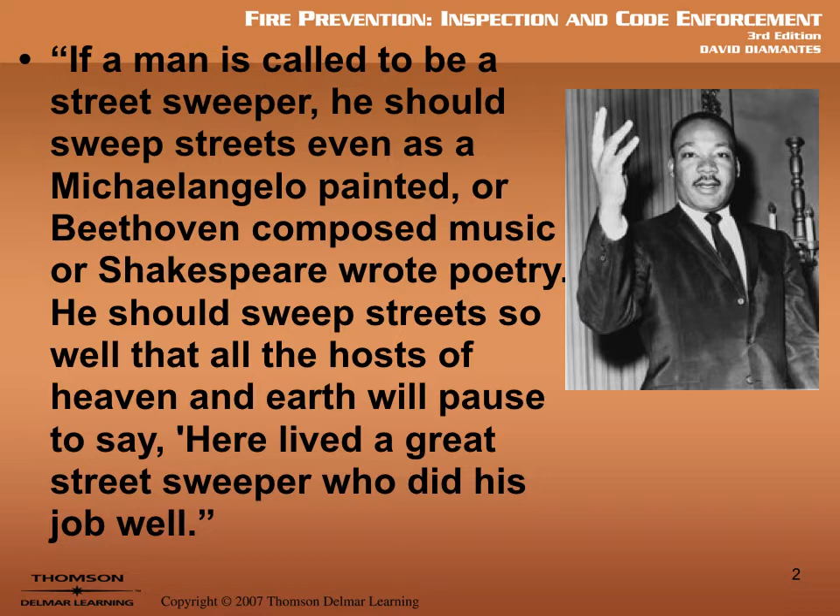Martin Luther King was quite a great man, and he had a great attitude on work. He said, if a man is called to be a street sweeper - now you might think street sweeper, well, before there were vehicles that did street sweeping, one of the worst paying jobs in a town was to be the person that would go out and sweep the streets. It was considered even to be lower than, some people think the lowest paying job or the lowest job in a business is being the janitor or the custodian, the person that cleans up the bathrooms. Well, back in the day that he said this, street sweeper was as low as that, if not lower. So he's saying if you've got the worst job in town, if a man is called to be a street sweeper, he should sweep streets even as Michelangelo painted, or Beethoven composed music, or Shakespeare wrote poetry. He should sweep streets so well that all the hosts of heaven and earth will pause to say, here lived a great street sweeper who did his job well. I think that's a great quote. Do your best at everything you do, no matter what you do. Always do your best.

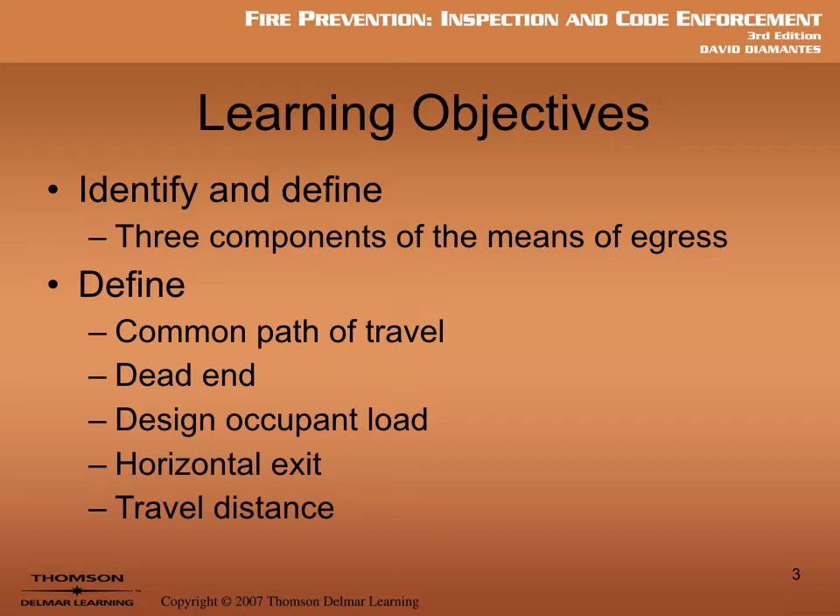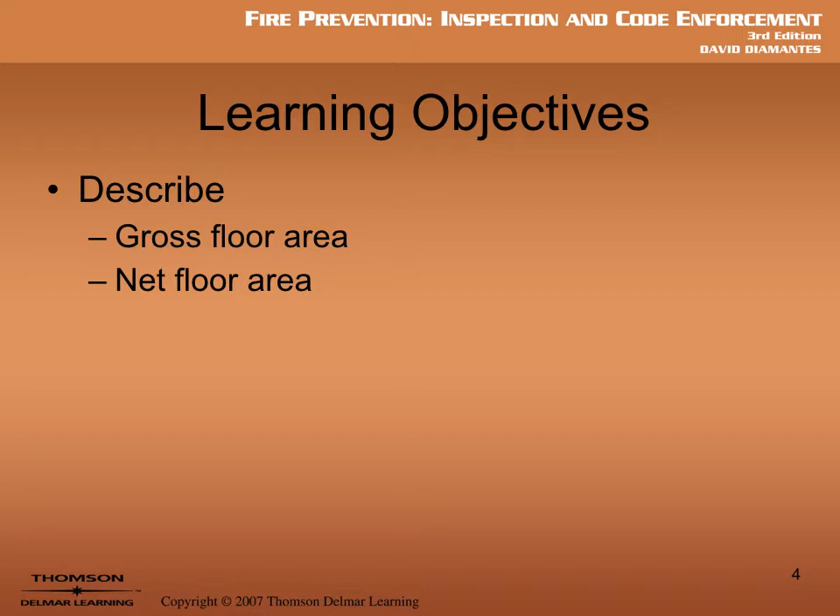Today we're going to talk about means of egress. We're going to talk about the 3 different parts of a means of egress system. We're going to define some words like common path of travel, dead ends, design occupant load, horizontal exits, travel distance. We're going to talk about the difference between a gross floor area and a net floor area. I'm sure you're familiar with these terms because you have your gross pay and your net pay when you get your paycheck, and it's always way bigger of a difference than I would like. Uncle Sam takes a lot of money away from us.

We're also going to talk about the 6 steps that we use to design a means of egress system. Let's make sure that we get people out in a safe manner. We want to create the system for everyday use, but also for worst case scenario. When there's an earthquake, when there's a fire, or some kind of an emergency, how do we get everybody out safely?

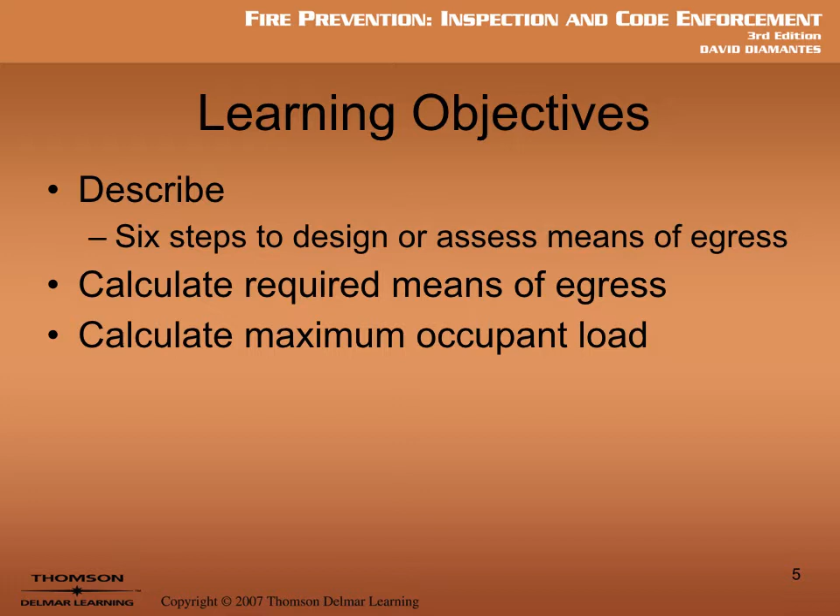We have 3 important terms you want to pay attention to and understand for this chapter: use, occupancy type, and occupancy load.

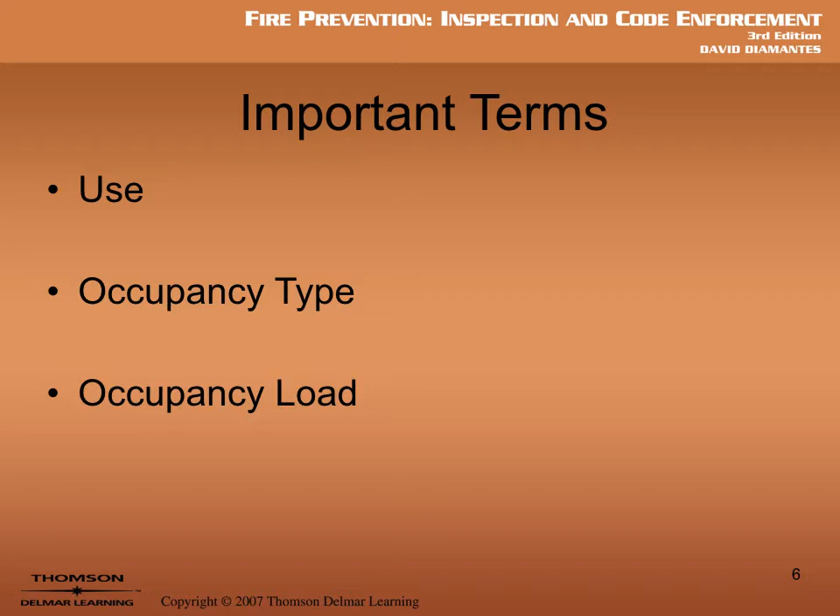Use is obviously what the building is used for. It's the answer to the question, what are you going to do there? This is very important for fire prevention. Every building - the height of it, the width of it, the kind of materials that are used - everything is based on what you are going to be doing in there. Are you going to live there? Are you going to make stuff there? Are you going to store hazardous materials? All of that matters, so use is a very, very important question we need to ask each person.

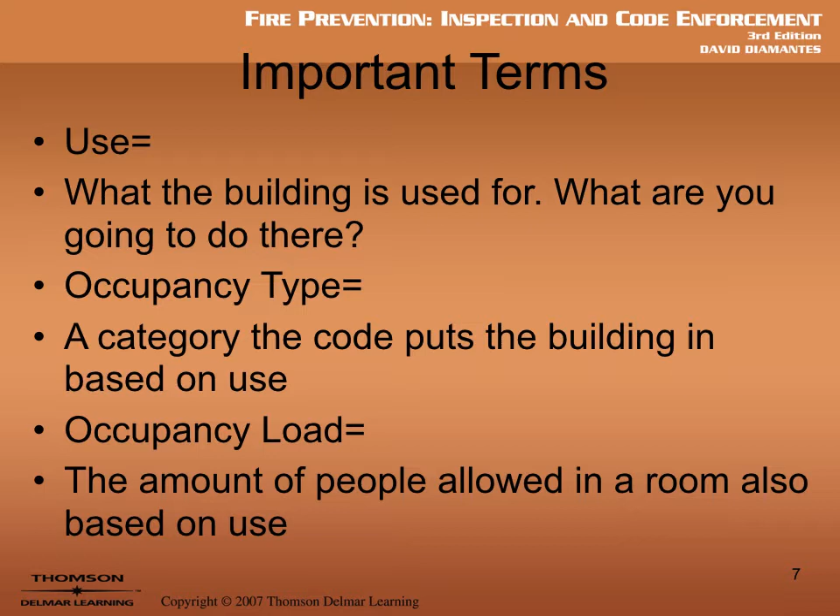Based on what they say the use is going to be, the code has put people into categories, and we call that occupancy type. So occupancy type is the category that the code puts this building in based on what you're going to use it for - what's the use? Now, occupancy load is an extension of both of those terms. Occupancy load is the amount of people we're going to allow in each room, or in the building as a whole, based on that use.

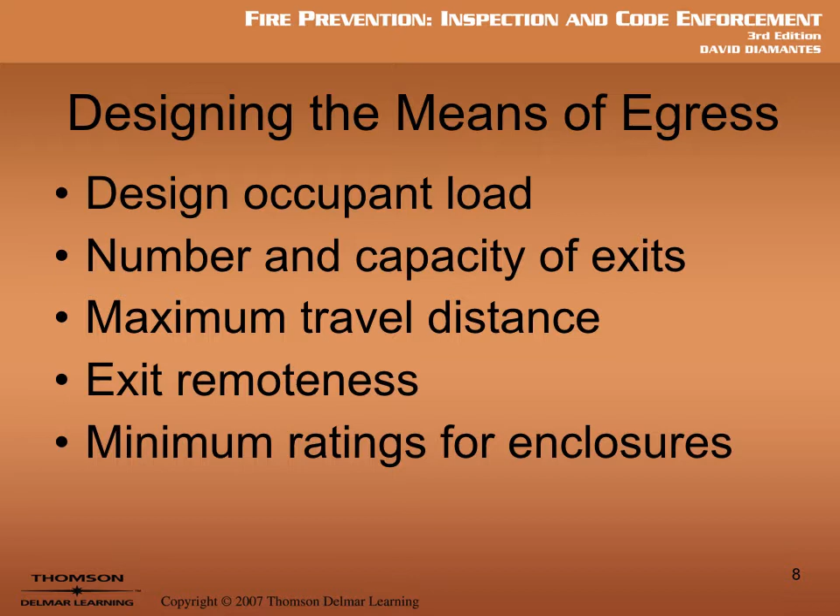So when we design a means of egress system, one of the first things we need to know is what's the occupant load - how many people are going to be there? Based on how many people are going to be there, then we're going to figure out how many exits we have to have. How far can a person go from their station where they work - maybe it's a desk, maybe it's a lathe, maybe it's a drill press, whatever it might be - from where they are to where they get to an exit? We call that maximum travel distance. Exit remoteness: are we going to allow all the doors to be right next to each other, or do we need to have them spaced throughout the building? And minimum ratings for enclosures. All of these things are going to be a part of the means of egress.

So there's a lot of code provisions that, as we establish this means of egress, are going to say, well, what's the size of the door? What way does it swing, out or in? There are situations where we do want doors to swing in. The hallway doors at the school swing in because we don't want to smack somebody walking down the hallway when opening a door to exit the classroom. But notice that the doors going directly outside all open out so it's easier to exit in an emergency. The locks, the way they latch, the lighting, exit signs, adequate identification—all of these are provisions in the code.

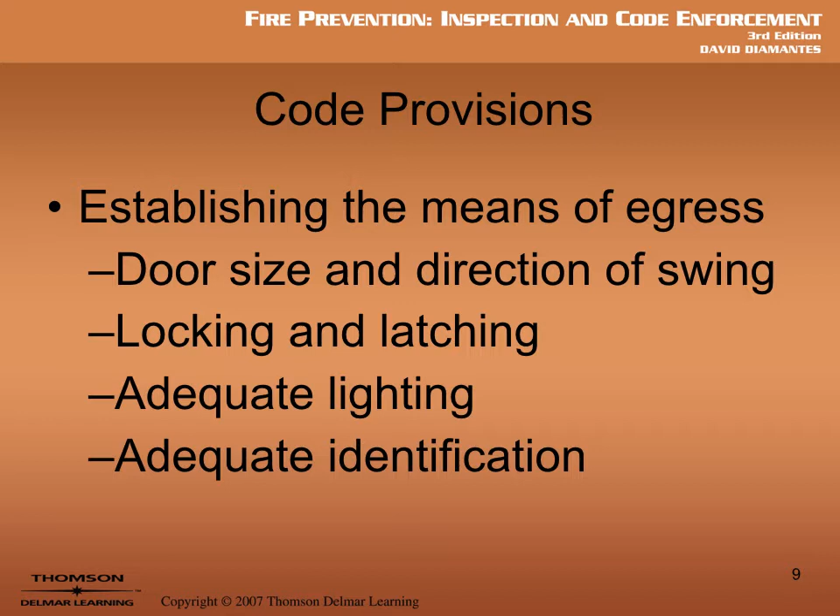So let's get right to it. The three parts of a means of egress system are exit access, exit, and exit discharge. Those are the three parts, but there's a fourth definition we need to understand: every exiting system ends at the public way, and we'll define that in a second.

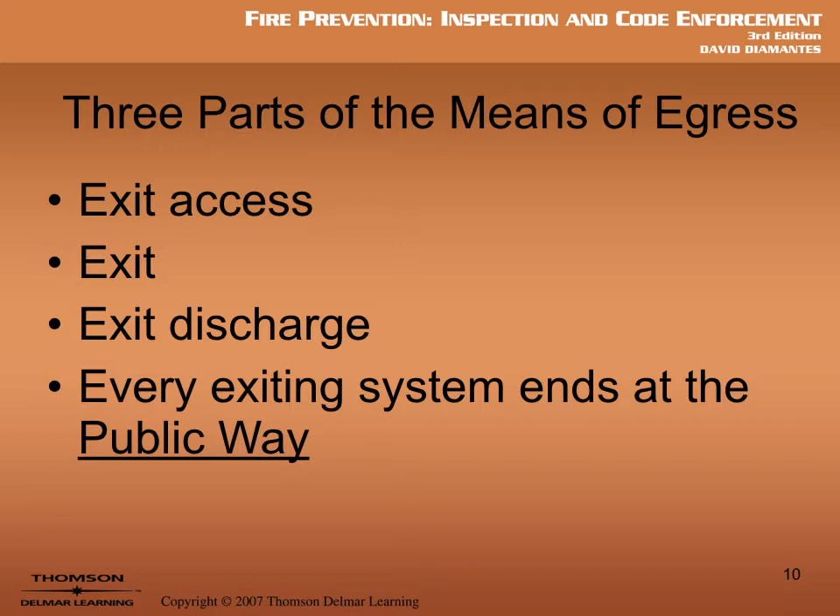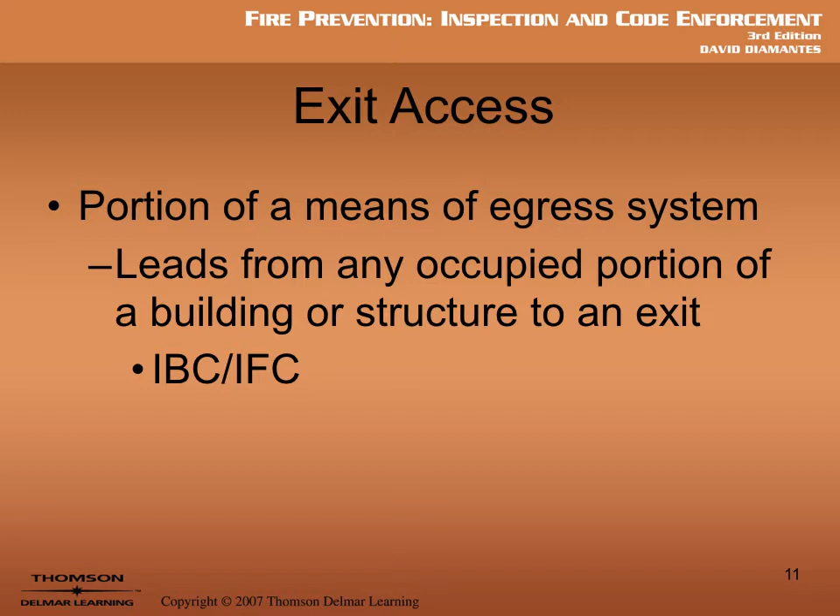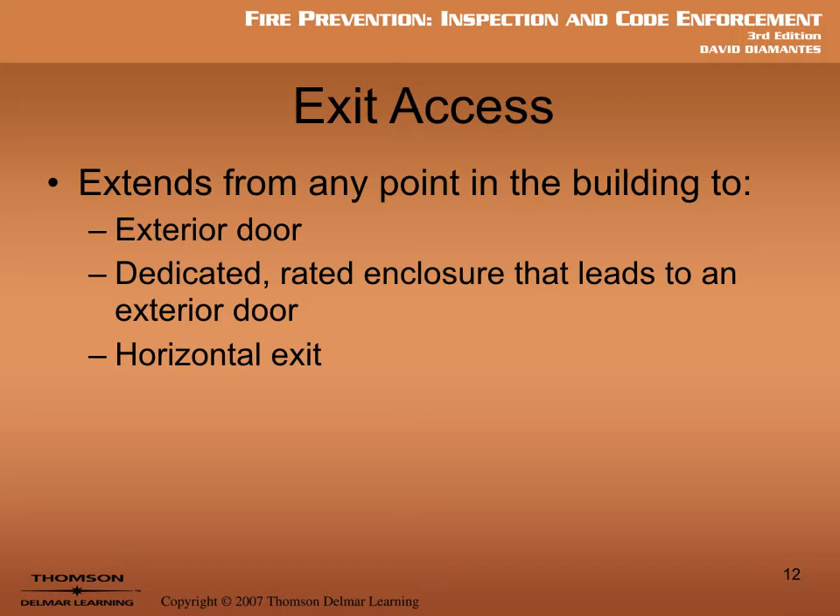So what's the exit access? It's every portion of the means of egress system that's not in the exit. It leads from any occupied portion of the building, room, or structure to an exit. So the exit access extends from a student's desk in the room until they get to an exit door, an exterior door, or, as we'll see in the definition of exit, a dedicated rated enclosure that leads to an exterior door or to a horizontal exit. Basically, if you're not in the exit, you're in the exit access. If you're in the building and not in a portion considered exit, you're in the exit access. We'll understand this better once we define exit.

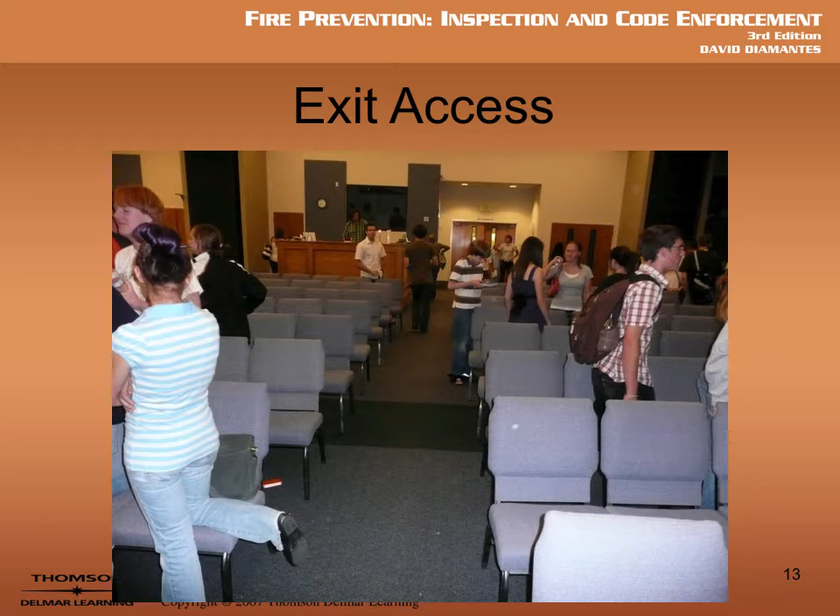So it's very important to understand, then, what's the exit? It's that portion of the means of egress system that could be just an exterior door. It also has to be separated from interior spaces of the building with fire-resistance rated construction. So once you're in the exit, here's a very important term: once you're in the exit, you're protected. Fire-resistant rated walls, opening protectives, fire-rated windows, fire-rated doors—these are all components of the exit that provide a protected path of egress travel.

So if you go from a classroom into a hallway, it's not necessarily fire rated. But if it is fire rated, you'll have doors with very small windows, and those windows are fire rated, so they'll have a little wire in them. The door will be thicker because it's going to slow down the spread of fire. All of the walls will have double the amount of drywall so the fire goes slower through those walls. So once you're in the exit, you're protected.

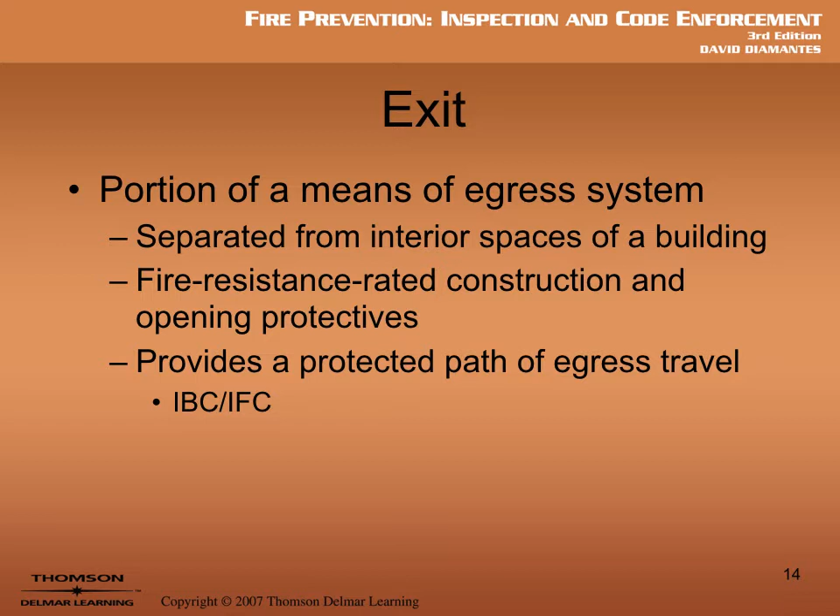So an exit may only be the thickness of an exterior door, or if you're in a protected hallway or protected corridor, it could be an unlimited distance. In the exit access, you have a maximum travel distance—you have to be within a certain amount of feet from the exit. But once you're in the exit, we're making it so you're protected, so it can be an unlimited distance. You can have a stair tower that's 27 floors high, but once you're in there, all the doors are fire-rated doors, all the walls are fire-rated walls, and maybe we're even using smoke evacuation, or positive pressuring the stair tower so you have clean air in there. You're protected.

Another example is the big long exit passages in a mall. Any of you who've worked at a store in the mall know that on the backside of each store there are these big, huge passages. Part of that is for your deliveries, but it's also your exit path out of the mall.

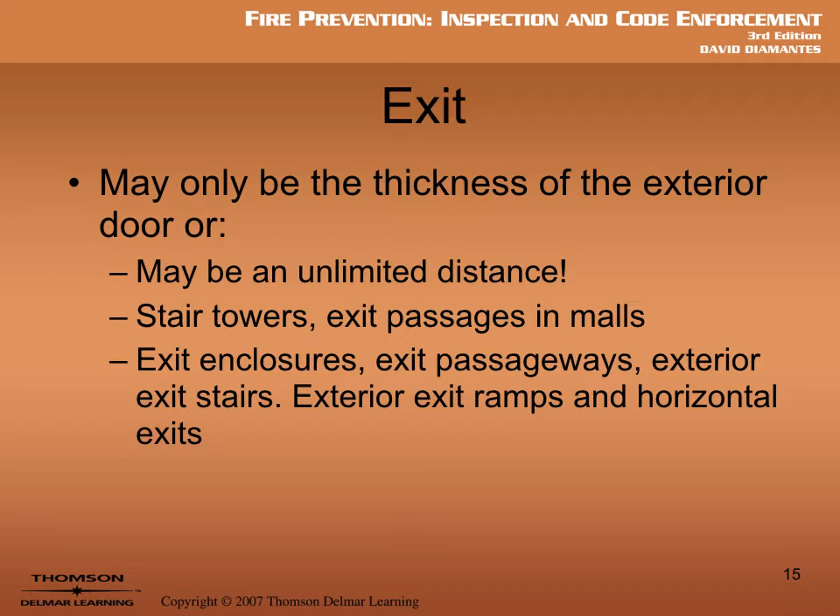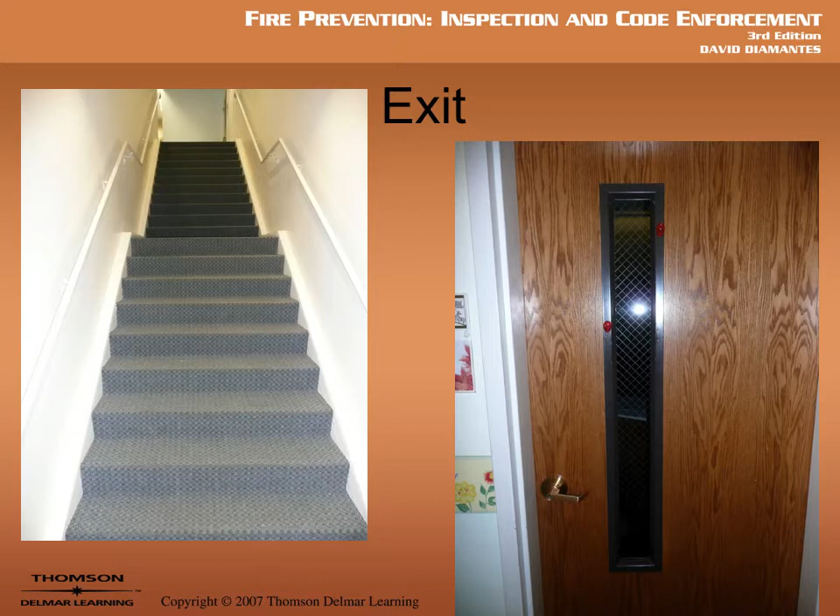Well, what about when you get to the bottom of the stairs? When you get to the bottom of the stairs, it exits into this corridor. And this corridor is also fire rated. Every one of the doors that enters into this corridor is a fire rated door. The walls are thicker. And as I mentioned with the stairs, this has got a little bit of a ramp.

So because there is an elevation change, there has to be railings. And that ramp can only go down 1 inch per 12 inches out, 1 inch down, 12 inches out. And that's because of wheelchairs. We don't want anybody getting on here in a wheelchair and then zoom, they're all the way down at the bottom. We don't want that to happen.

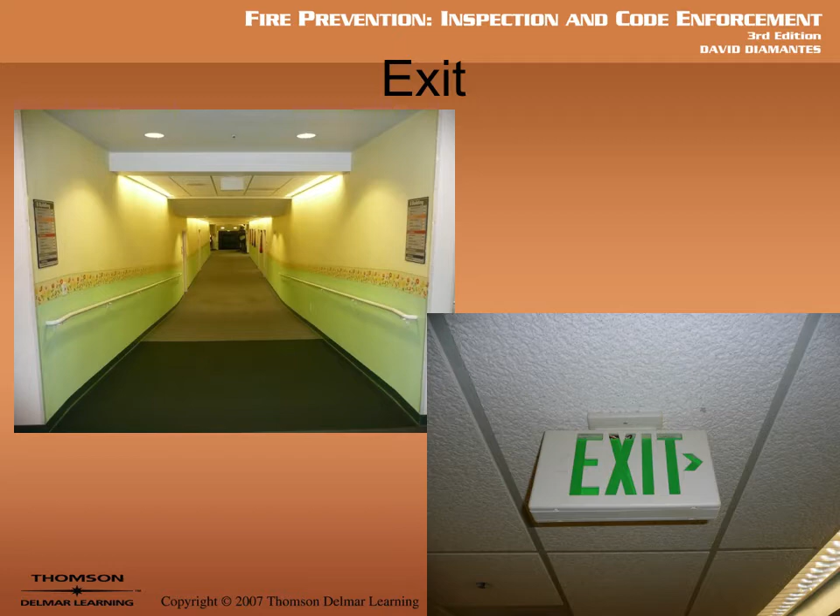And that is all the components, or can be the components, of an exit system.

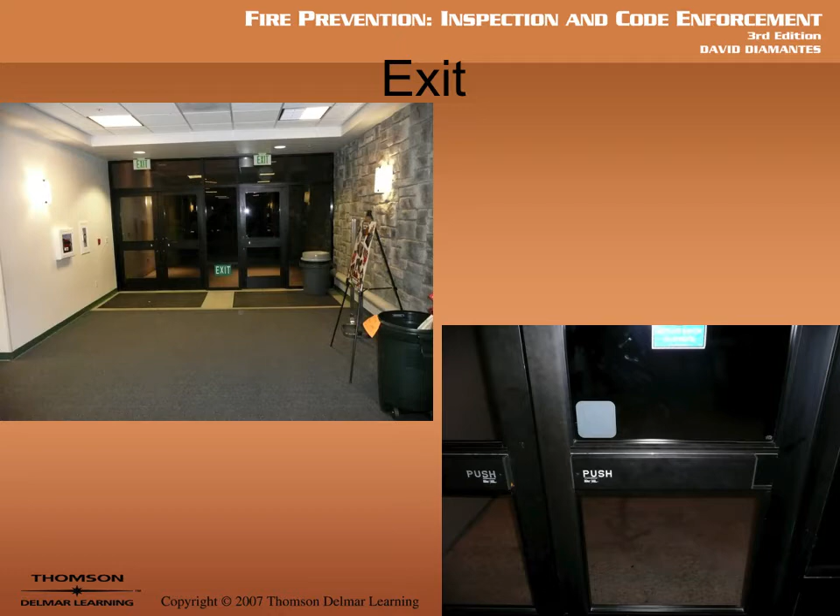Now, there's another kind of exit. It's called a horizontal exit. And a horizontal exit is when you go from one building to an area in another building. But if you do go into a horizontal exit, you've still got to be protected. It's got to be approximately the same level. And sometimes this is through or around a partition to an area on the same level in the same building.

So sometimes buildings, like especially factories, might be so big that it's one building, but they put a wall in the middle to make it like it's two buildings. And that wall in the middle will have fire-rated doors, and usually these are the sliding kind that have a fusible link, and that melts when there's fire, and then there's a weight that pulls the door closed and makes it so the fire won't go from one part of the building to the other part.

But it's still part of the exit system, and if you go horizontally from one building into the next, they call that a horizontal exit, and now you use that exiting system to get out.

There are also some where you actually go from one building to another building, and the only example I know of that is the Kodak Theater that became Cirque du Soleil and now has a new name. I don't know what it's called, but it's down in Hollywood. And you go from the theater into, it's a horizontal exit. It's a passageway that goes from one building, and at the second level, it goes into the mall next door. And you enter into that mall's exiting system, and you get out of the building that way. You have to be safe from fire and smoke if you're in a horizontal exit.

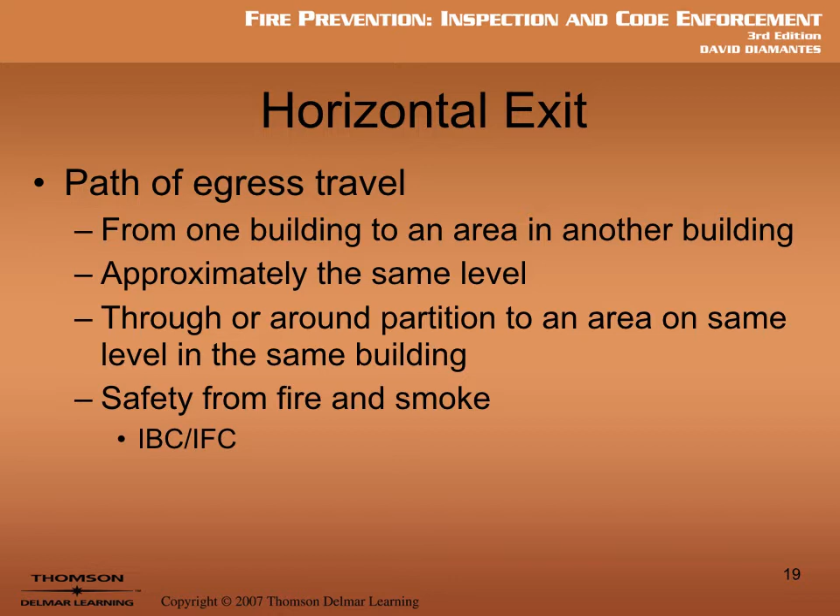Lastly, we have the exit discharge. Once you get outside of the building, you're in the exit discharge, but you're not necessarily safe yet unless you're at the public way, which we're going to explain in just a second.

Some buildings exit straight to the public way, so they don't have an exit discharge, but most have just sometimes only 10 feet of sidewalk or whatever.

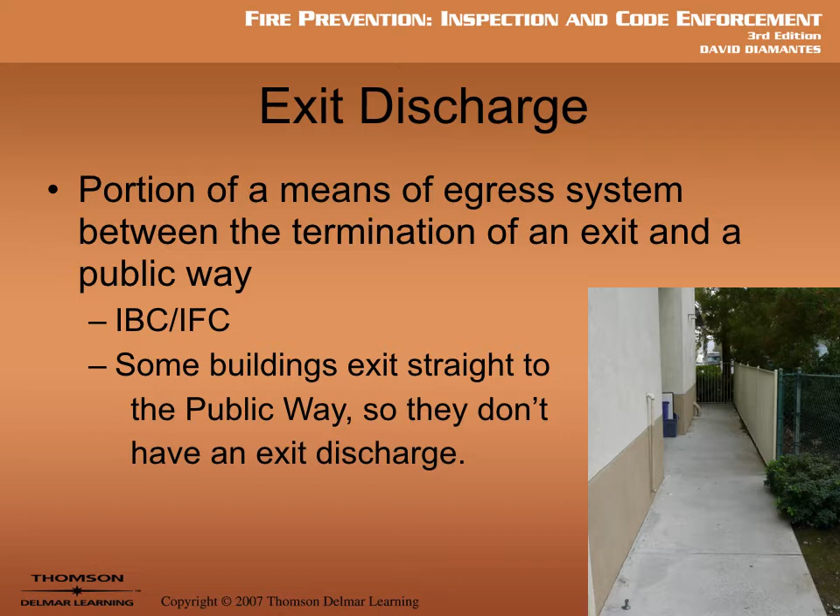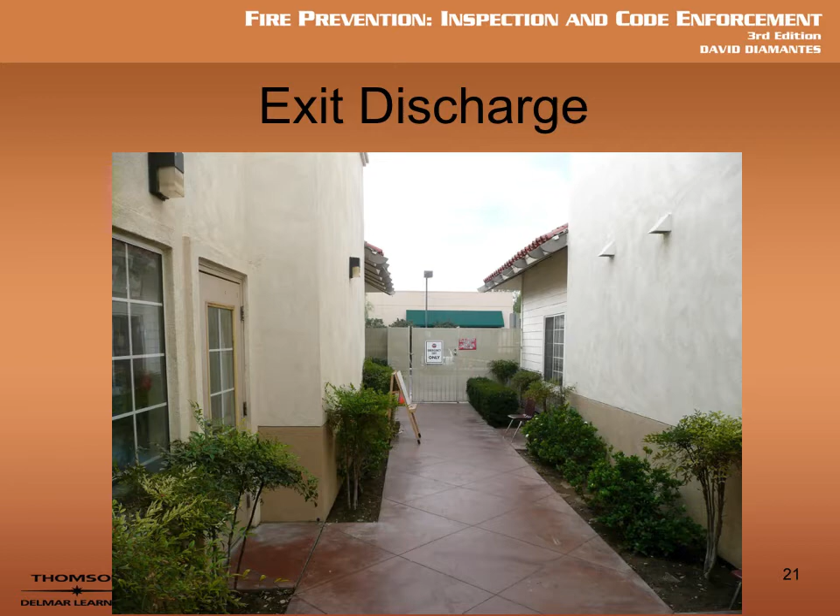There should be panic hardware on there. I tried to talk them into adding panic hardware. But you push it, it opens, and now you're out in the parking lot, and that is considered safe.

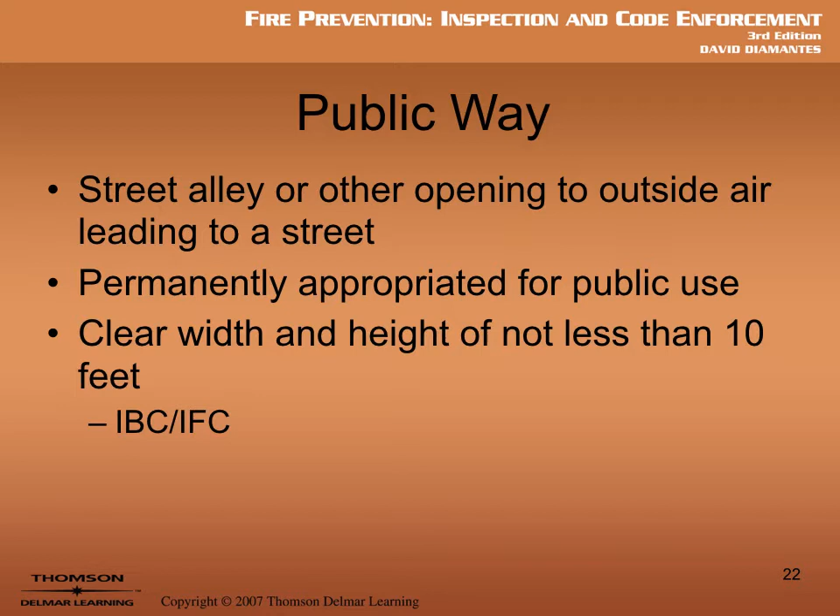So when you're safe, we consider that the public way. By definition, the public way is a street, alley, or other opening to outside air leading to a street. Basically, it's considered permanently appropriated for public use. If it's clear width and height of not less than 10 feet, then we consider that the public way for public use. All of those parts have to go together to make it the public way.

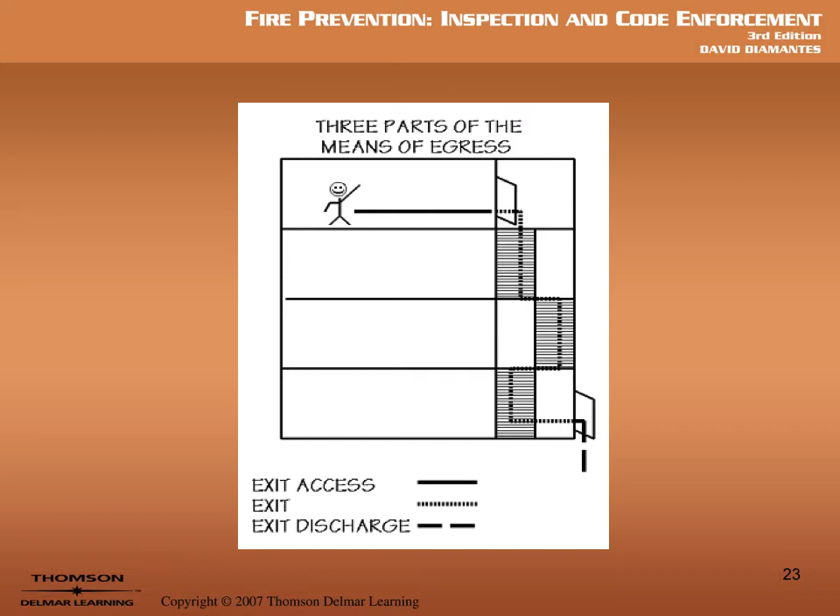Then once you leave the building, if you aren't yet at the public way, there will be a portion called the exit discharge, and you go through that portion of the building to the parking lot or to the street, and then you're considered at the public way.

When we design these systems, the first thing we have to do is figure out how many people can be in this building. That's called the design occupant load. So how do we do that? Well, again, we got to ask the question, what are you going to do there? So design occupant load equals how many people can be in a room.

The formula for figuring that out is, first of all, you've got to find the area of the room. Well, oh my gosh, this is math. I'm sorry, you got to go back and do some math. How do we figure out area? Length times width. Yep. What if it's a circle? Pi r squared or something like that.

So then you divide that area by a factor that you're going to find in a table in Chapter 10 of the building code and the fire code. It's the same in both of them. Based on what they're going to do there, we're going to find a factor in this table, and we're going to divide the area of the room by that factor. That's the answer to the question, what are you going to do there?

Now, this is one of those places where you got to be careful. You're not going to use the occupancy type like we learned about. You're going to use the answer to the question, what are you going to do there? Because within an assembly, there's a lot of different uses, a lot of different ways we're going to use the room. So we're going to divide it by whatever you're doing in that area.

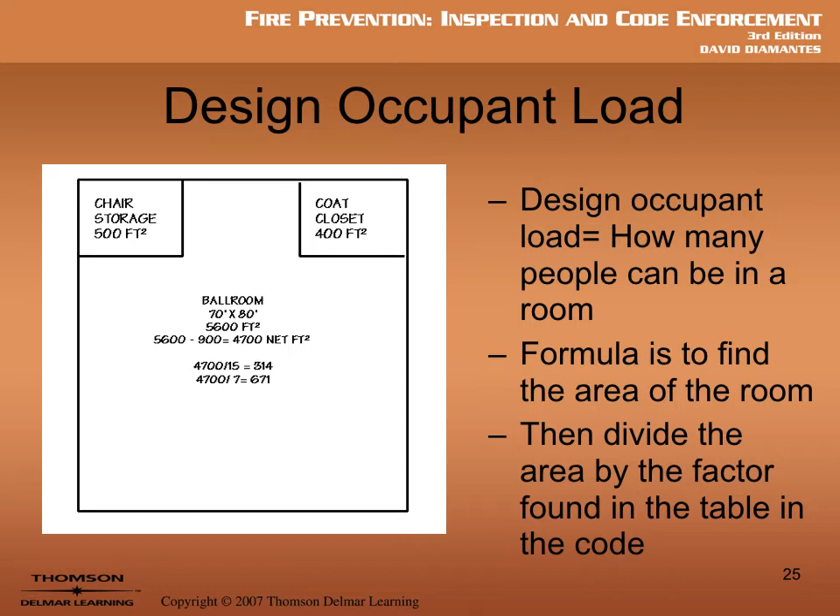So that leads us to two kinds of factors. First, there's gross floor area. In some places, like factories, we're just going to take all of the building. Let's say it's a factory - we'll factor in the closets, the bathrooms, all areas of the building. That's the gross, the total of the room.

We're going to divide the area by the factor that the code tells us. It might be 20 or it might be 100. So if we have a 4,000 square foot building that's for a factory, it's industrial use, the factor is 100. We divide 4,000 by 100, and we can have 40 people working in that area.

Net floor area is in situations like this drawing on the left. A ballroom that has a coat closet, it has chair storage, but we might dine there, but we also might dance there, we also might watch a concert there. There's all of these different kinds of uses. So with that, we're only going to divide that part of the room that's being used for a particular use.

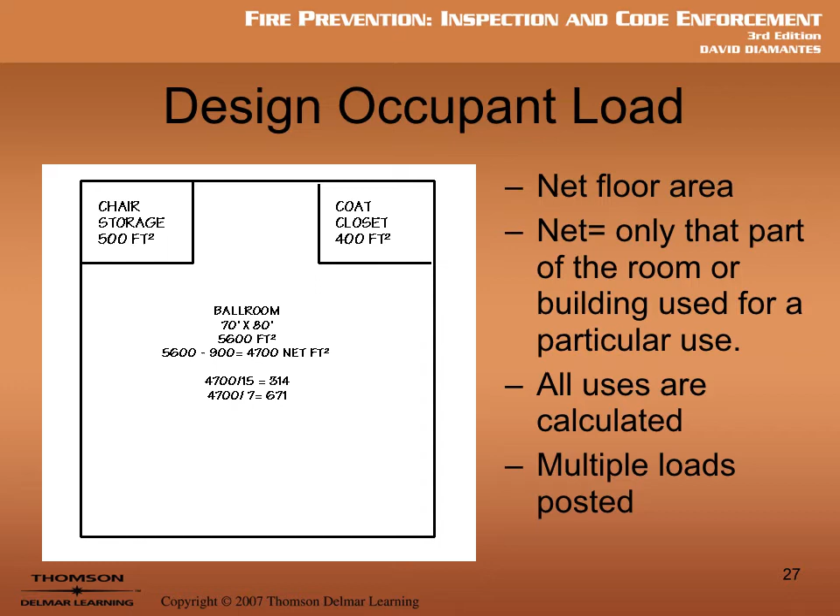So the dancing area, we'll figure out what that is. The dining area, we'll figure out what that is. Then all uses are calculated. We'll get a total for the building, but we'll also give a total for each area. And if there are multiple uses, we're going to post them all with an assembly. We require that they put the amount of people allowed in the room on a sign on the wall.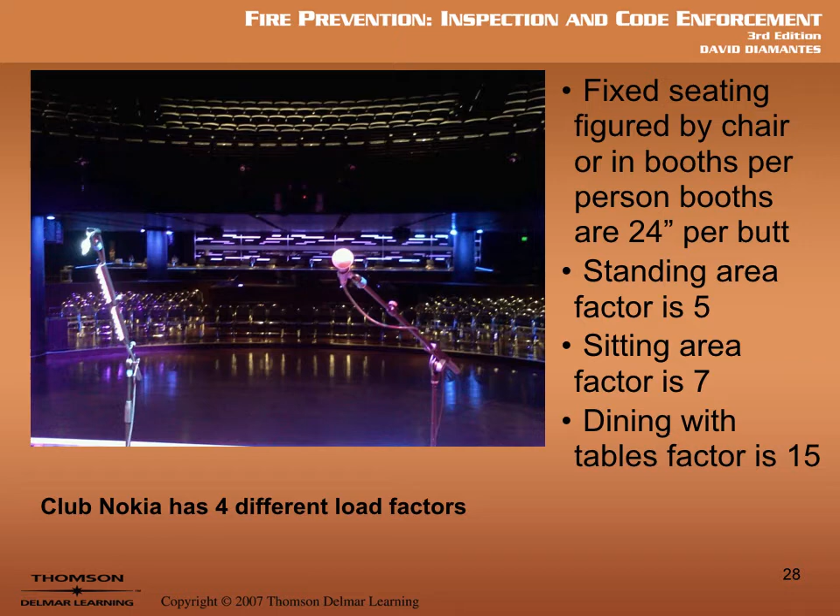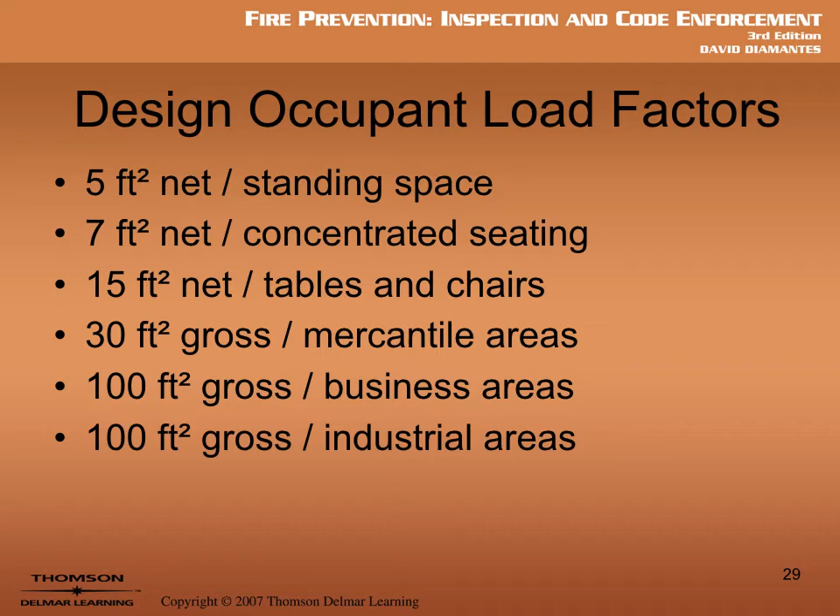So again, we see that the design occupant load factors - these are all from the code. 5 per square foot, 7 per square foot for concentrated seating, 15 per square foot for tables and chairs, 30 per square foot for mercantile areas, 100 per square foot for business areas, and 100 per square foot for industrial areas. There's a lot more in this table, and you need to download that. You'll see it in your project.

Then, once we figure out how many people are going to be in the room or in the building, then we figure out how many exits. So the code tells us there are certain exceptions where one exit is allowed. These are kind of rare, small offices and things of that sort.

Basically, if you have 50 or more people, you're going to be required to have 2 exits. But sometimes even when you have less than 50 people, there is a requirement to have 2 exits. So it just depends, that's kind of a complicated thing, so we're not going to get into it. For our purposes, if you have up to 500 people, we're going to require 2 exits. If you have 501 to 1,000, we're going to require 3 exits. And then once you get over 1,000, 4 exits.

Well, guess what, that's the last one. Now wait a minute, what about a theater or a concert hall that holds 8,000 people? You're telling me that 4 exits is enough? There's another little complicated part to this that we will figure out and show that we're going to require more exits based on the amount of people.

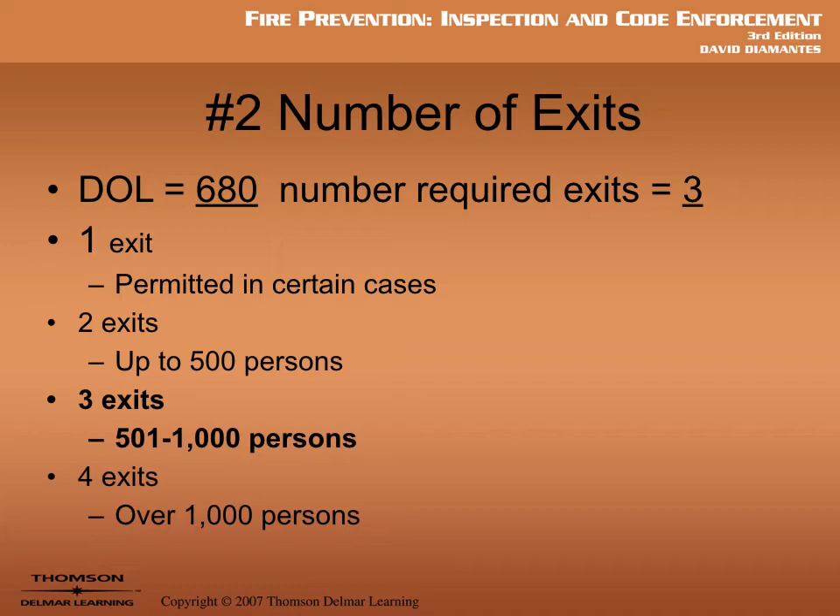So after we figure out how many exits, we're going to figure out the exit remoteness. Now that's done with math again. Oh no, I hate math. But this one's not too hard.

The exit remoteness, the code says that the exits have to be spread apart by figuring out half the longest diagonal. So you go from one corner of the room to the opposite corner. You measure that. Now you can figure that out with math because it's a right triangle. And the next slide shows you how to do that.

And I look at it and I still don't understand, but I'm not good with math. But the diagonal from one corner to the other in this example is 50 feet. So half of that is 25 feet. So the code is telling us that the exit doors have to be a minimum of 25 feet apart. That way, half of the room can go out one side of the building and half can go out another side.

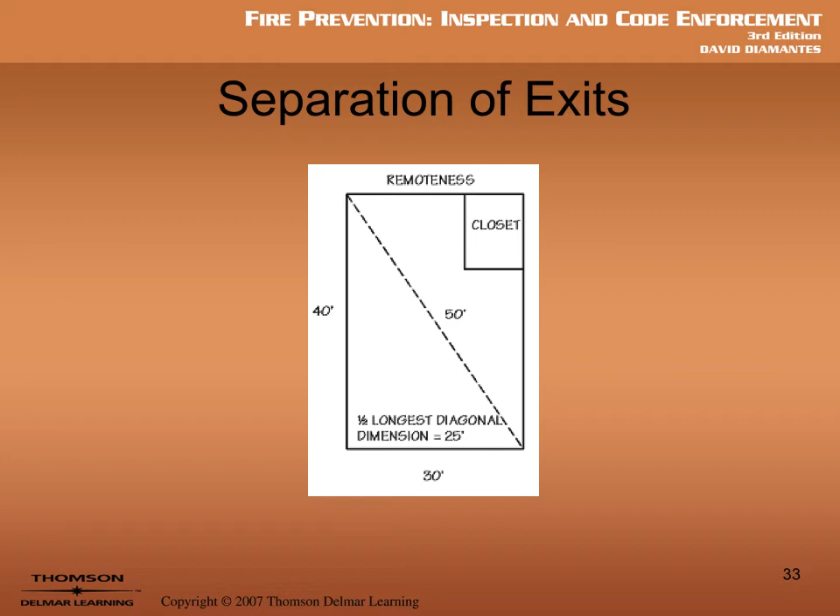So yeah, this is saying 100 by 130 is the restaurant. 100 squared plus 130 squared gives you the overall diagonal dimension. I don't know, this confuses me, and then there's a square root thing in there too. So maybe you understand this, I'm just going to measure from one corner to the next corner, half that.

Now, if it's non-sprinklered, it's one thing, but if it's sprinklered, we're going to let them be a little bit closer. But you know, you can figure that out. I just do it the old-fashioned way. I measure from one corner to the next corner, and half of that, the door's got to be at least that distance apart.

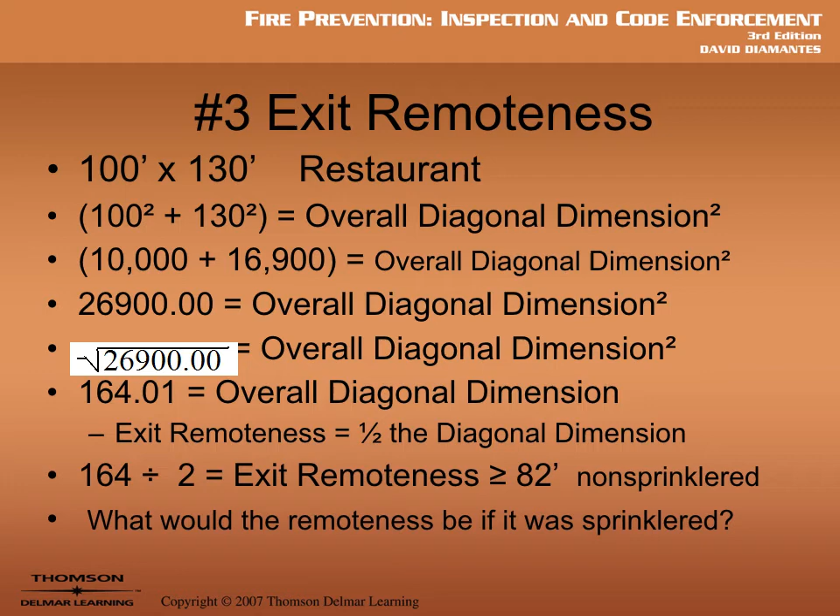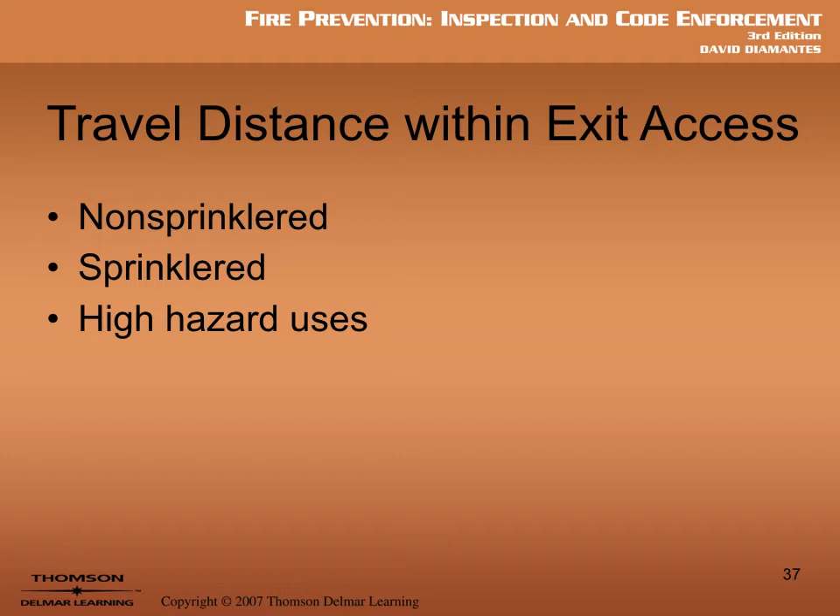Well, what about maximum travel distance? When you are in the exit access, you have to be within a certain distance from an exit door. Now, if it's a sprinklered building, it's going to be a different distance than non-sprinklered. And high hazard uses, we're going to make sure that you're even closer to the exit. So generally, it's 150 to 200 feet for a non-sprinklered building, 200 to 300 feet for a sprinklered.

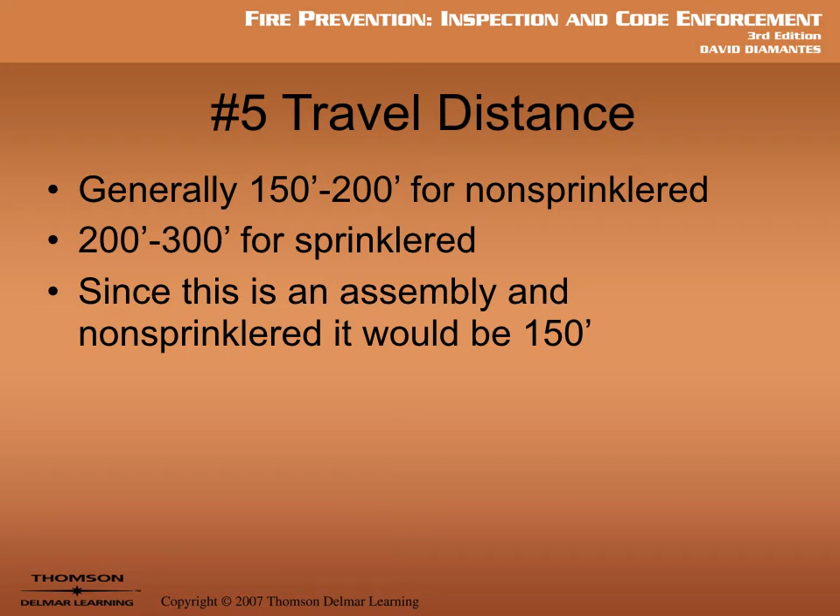Now, we've been looking at a building that was an assembly. So it's non-sprinklered, but you know, these days most of them would be sprinklered. But let's say it was non-sprinklered, it's 150 feet. So from anywhere in the building, when you're sitting at your desk or you're sitting at your table in a restaurant, you have to be, according to the path of travel, not as a crow flies, 150 feet from an exit.

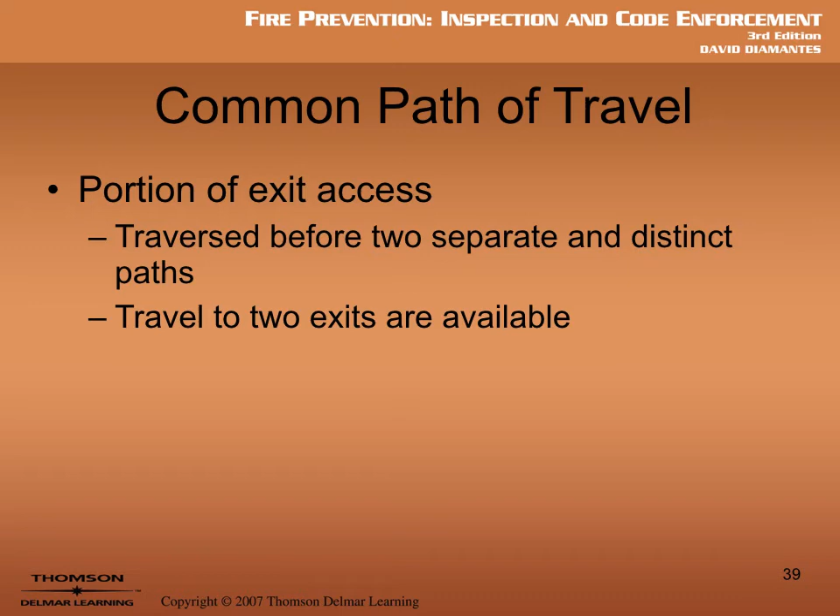So it's got to be the common path of travel traversed before two separate and distinct paths. So you got to travel to where two exits are available.

So look at this example here. In the green, you're in the exit access. So from the most remote office, you can pick this one or the one on the far right in the back. How far is it to an exit door? And you have to have, if two exits are required, you have to have two optional ways to go. And we're going to figure it out in the common path of travel as those green lines go.

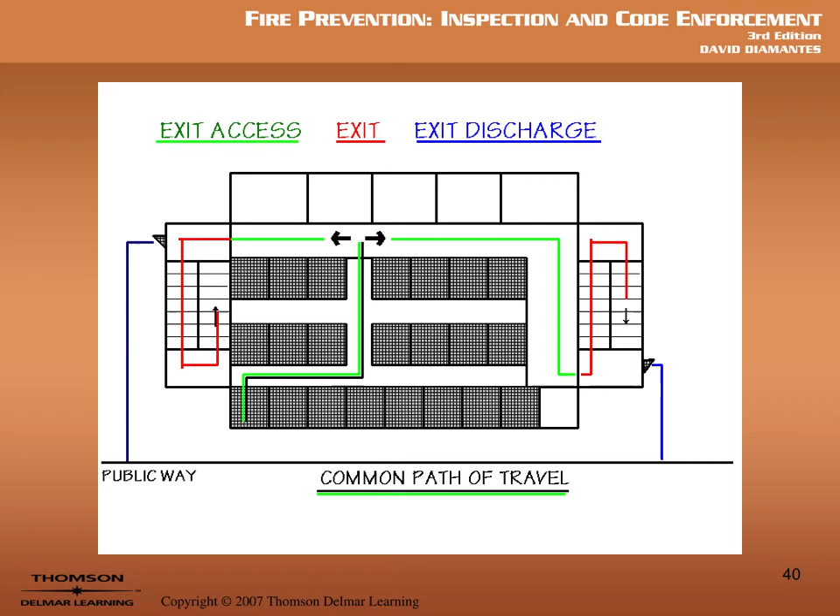And then once you get in the exit, once you get in the exit, now travel distance doesn't matter because you're protected. So it can be 1,000 feet, it can be 25 floors of stairs. You are protected, so it's going to be an unlimited distance.

Now, once we've figured out the design occupant load, how many exits is minimum, this is the minimum number of exits. We've spread them apart, and we figured out the travel distance. Now we got to figure out the exit capacity. We got to make sure that the hallways are wide enough. The aisles, where you're sitting, you don't want to be sitting where you can't stand up and get out.

I hate when I have to go to the restroom at a movie theater and I have to stand and walk out, stepping on everybody's toes trying to get out. It's really embarrassing. But we want to make sure that the distance between the front of a chair and the back of a chair is enough for people to get in and out, especially in a panic. Then the aisles, the hallways, until we get to the public way, it's got to get bigger as more people get into it.

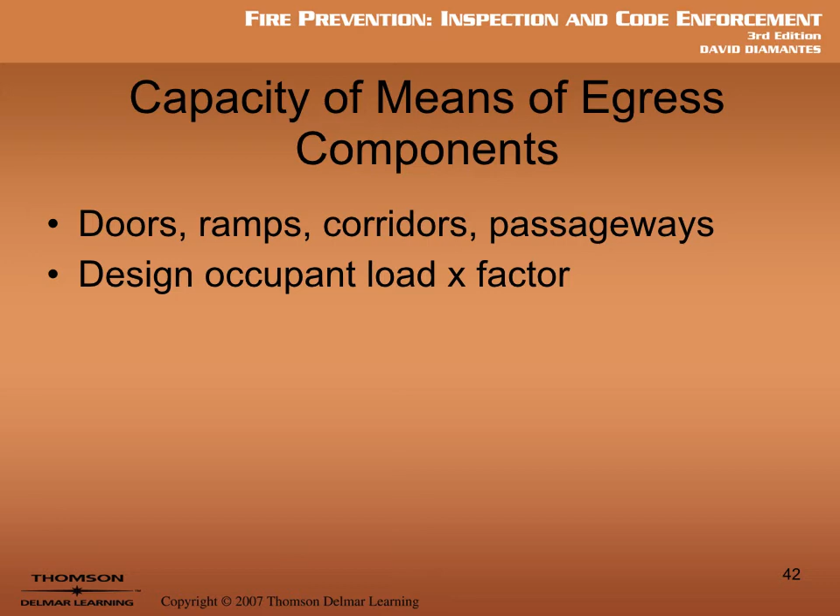So we want to make sure that the capacity is big enough. The doors, the ramps, the corridors, the passageways, everything is going to be based on that occupant load factor of the amount of people. So the code says if it's 50 people or less, we've got to have 36 inches for corridors, passages, ramps, and stairs. If it's 50 people or more, a minimum of 44 inches.

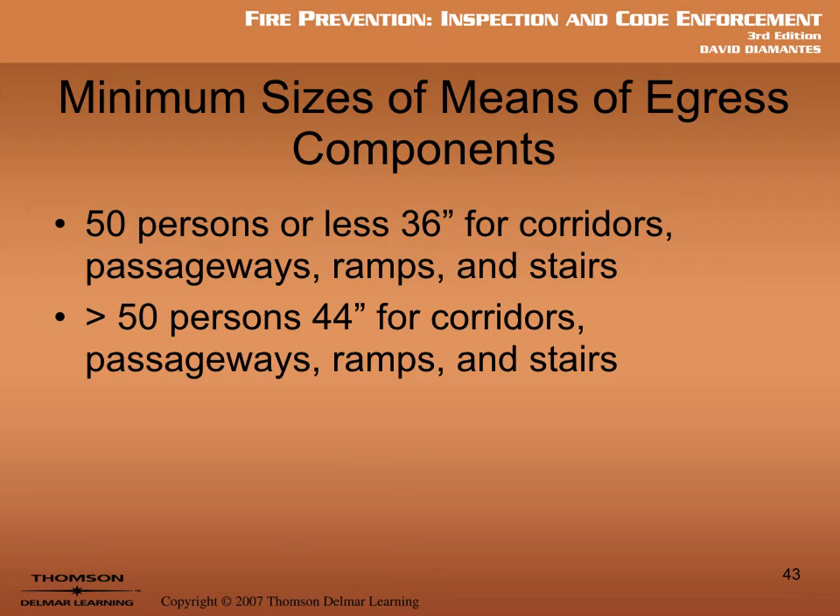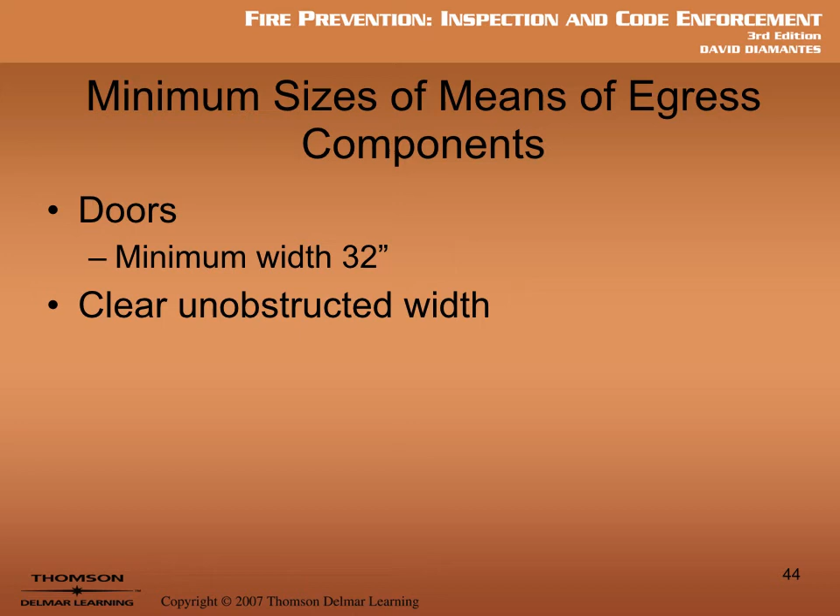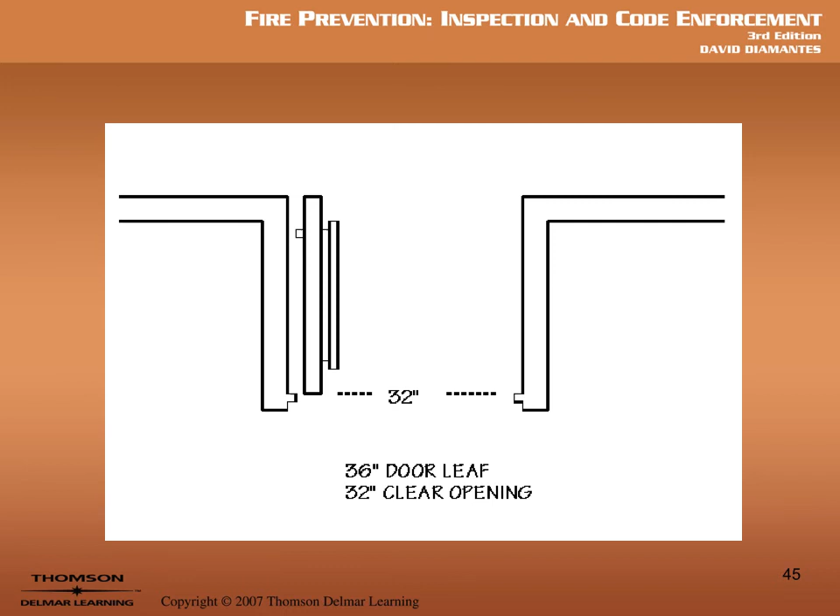The doors have to have a minimum width of 32 inches, and we're not talking from frame to frame. We're talking from the door to the other frame, so it's a clear, unobstructed width. Here's an example of that: the door to the frame has to be 32 inches, the door leaf from frame to frame is 36. That's a minimum.

Well, how are we going to make sure that it's enough? If our design occupant load is 680 people, we're going to times that by 0.2. That equals 136 inches. In a 680 occupant load, how many exits are required? It's 3. So we have 136 divided by 3, which means the exits have to be at least 45.33 inches wide, those 3 exits.

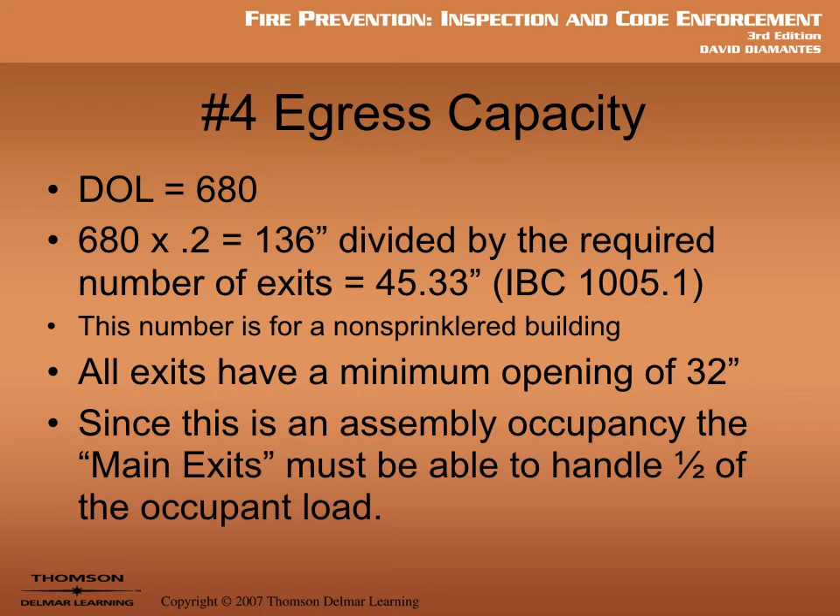So all exits have a minimum opening of 32 inches. Since this is an assembly occupancy, the main exits must be able to handle half of the occupant load. So we're going to put half in one place and the others in another, but we're required to have 45-inch doors or more doors. So the minimum clear space for the exit is 32 inches. If I divide that by my capacity factor, I'll find out how many occupants each door can handle: 32 divided by 0.2 equals 160 people.

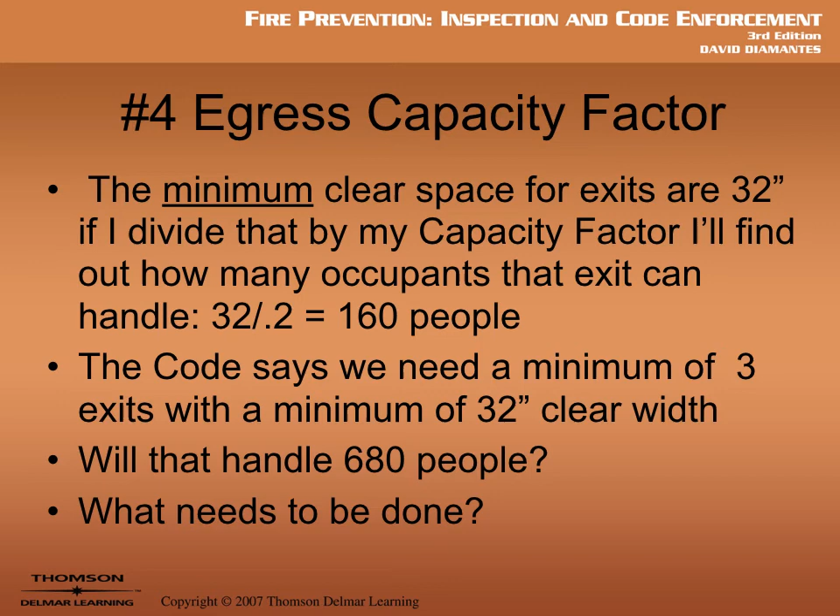The code says we need a minimum of 3 exits with a minimum of 32 inches clear width. Will that handle 680 people? No. So what needs to be done? The front exit needs to accommodate at least half, that's 340 people: 68 inches divided by 0.2 equals 340. The other doors are going to have to be larger than 32 inches.

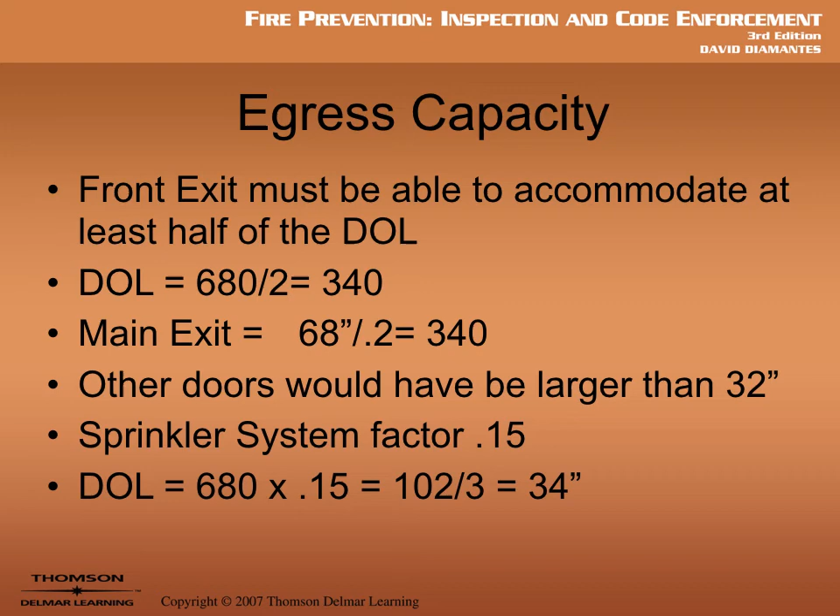Now, it talks about if there's a sprinkler system, the factor changes to 0.15. But the bottom line is when we divide everything by 0.2, we find that those 3 doors aren't enough. So if we have a 4,000 person assembly, rave place or nightclub, whatever, we divide the number by 0.2 and find that 4 doors for over 1,000 is the minimum required, but we're going to need more to handle this amount of people.

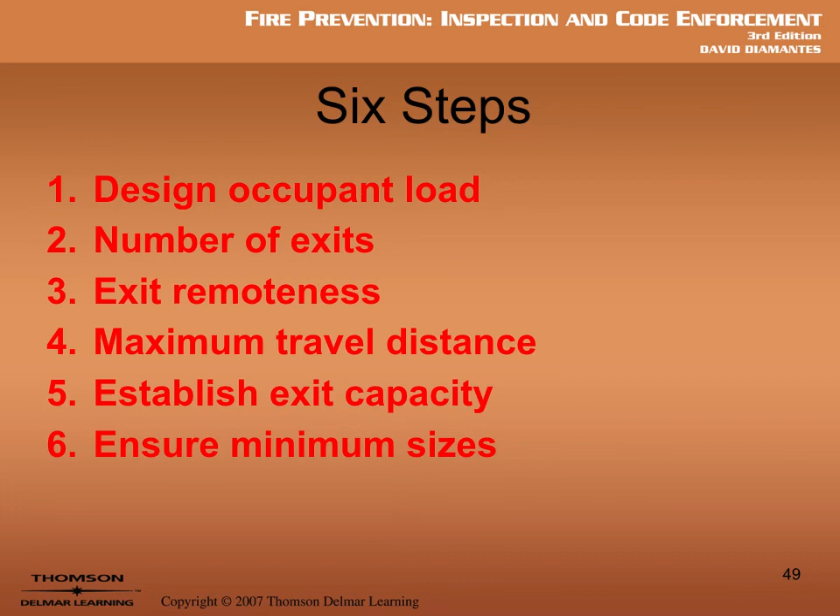Lastly, the last step, we're going to ensure that we have minimum sizes. So we're going to look through the whole process: 50 persons or less with corridors, as we said before, is 36 inches; 50 or more, minimum of 44 inches.

But as more and more people dive into the system, you're going to find... so if you've gone to the Staples Center, you're at your seat watching the game. Most of us can only afford the nosebleed section up top, and our seats are as close as can be because they want to get as many people in there as possible, but it has to be a certain distance based on the code. We get up to go, then we go down our little row to the aisle. Now the aisle is wider than our little row space was because more people are getting into it.

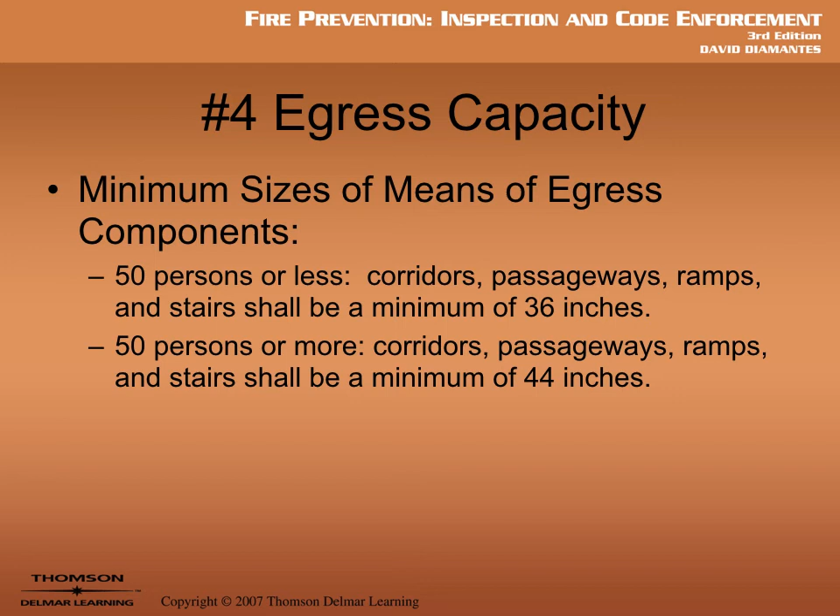As we go from that aisle down to the exit tunnel, it's wider because people are coming from different aisles into it. As we go from that tunnel into the main exit outside of the arena, we'll find that that's huge now because tons of tunnels are emptying. As more people come in, it gets wider and wider and wider. It can only get wider, never smaller.

Now, there's a lot of special requirements. The main exits from assembly buildings have to be able to handle a certain amount, half. What about if we have revolving doors? Well, there has to be an equal-sized door next to it that's a normal door. The locks and the latches, there's all sorts of special requirements on those.

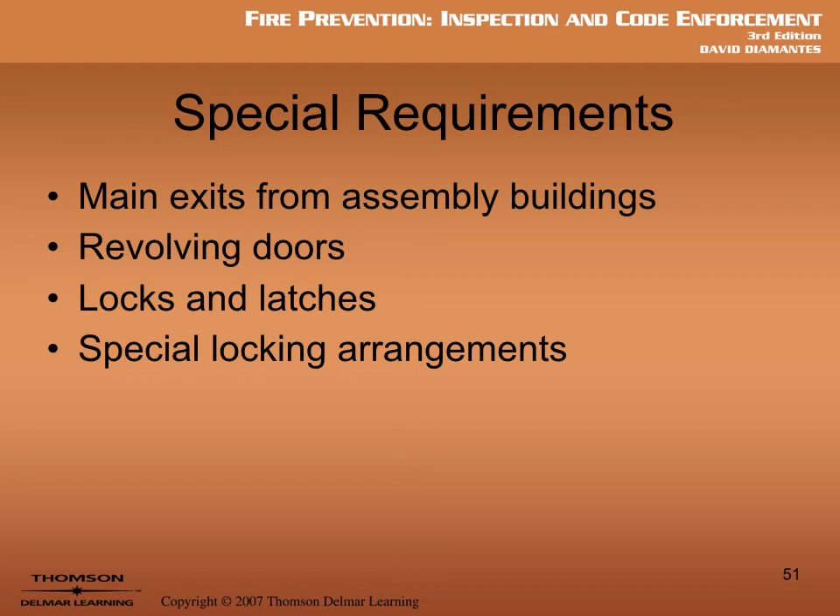It has to be single action. It can't have a deadlock, except there is an exception that if it is an assembly, they can put locks on it, but if they do that, they have to have that sign above the doors that says these doors to remain unlocked during business hours.

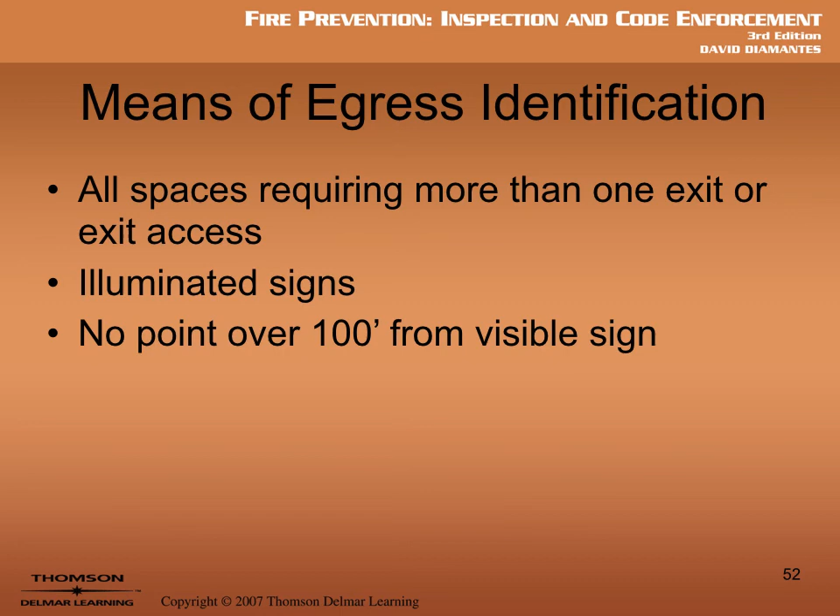We're also going to require that they identify this whole means of egress system. We've got to have exit signs, and the code says you have to be within 100 feet from a visible exit sign at all times. And they have to be illuminated.

So here's an exit sign you can see here that also serves as the other part. We got to make sure that the egress system is illuminated. So what if the power goes out? We're going to have battery backup or generator backup in the exit access and in the exit and in the exit discharge. We've got to have adequate lighting so that people can see.

Have you ever tried to go downstairs in the dark? It's not fun. So there's got to be proper illumination, and so you see those bug eyes in both of the pictures. Those are going to turn on if we lose power in a fire.

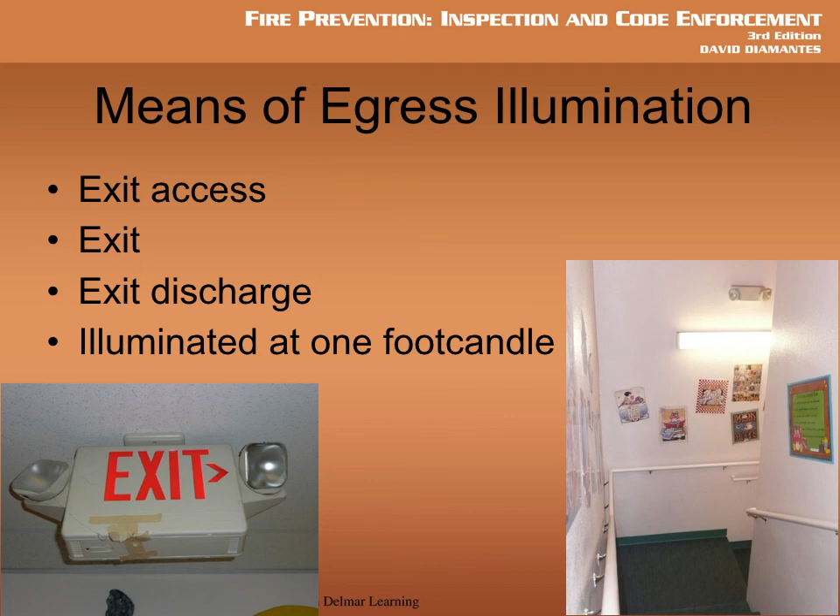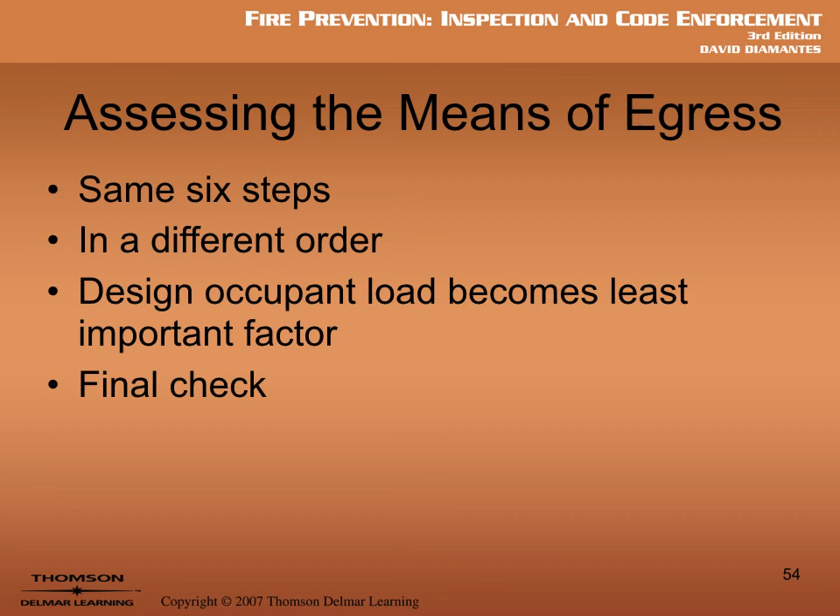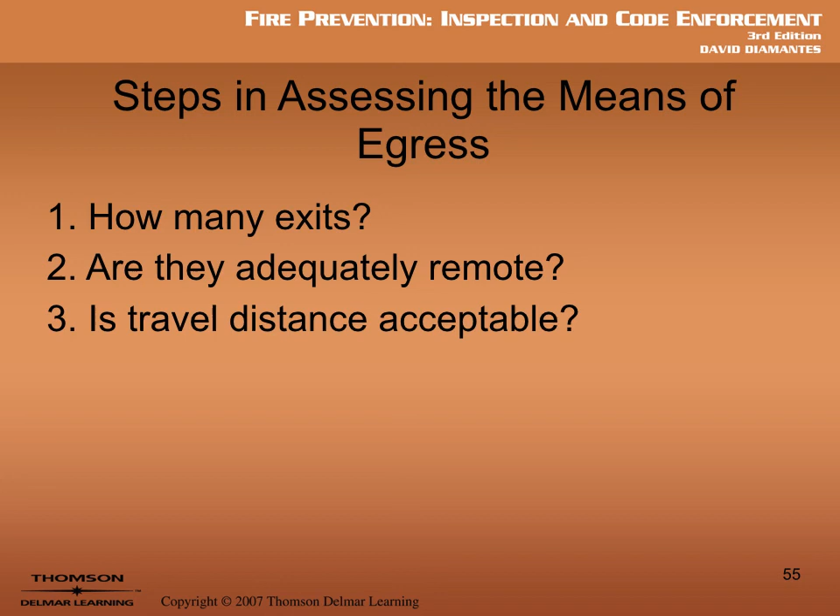So then they require that you assess the means of egress now backwards. You're going to look at the system once you've built it, and do the whole thing again and check all your numbers, make sure that you've done it adequately. So our steps in assessing the means of egress: we want to find out how many exits, are they adequately remote, is the travel distance acceptable, what is the capacity, how does the net floor area compare with the use, and are the exits all conforming?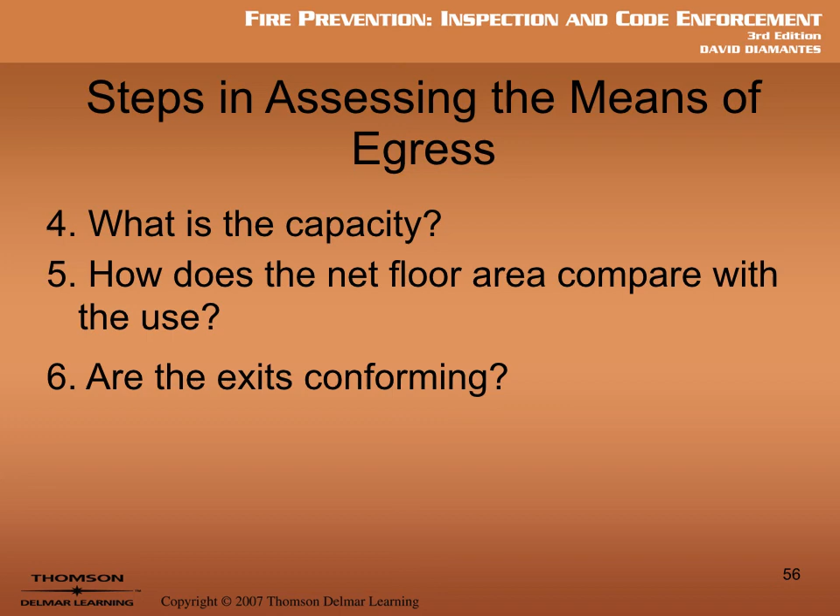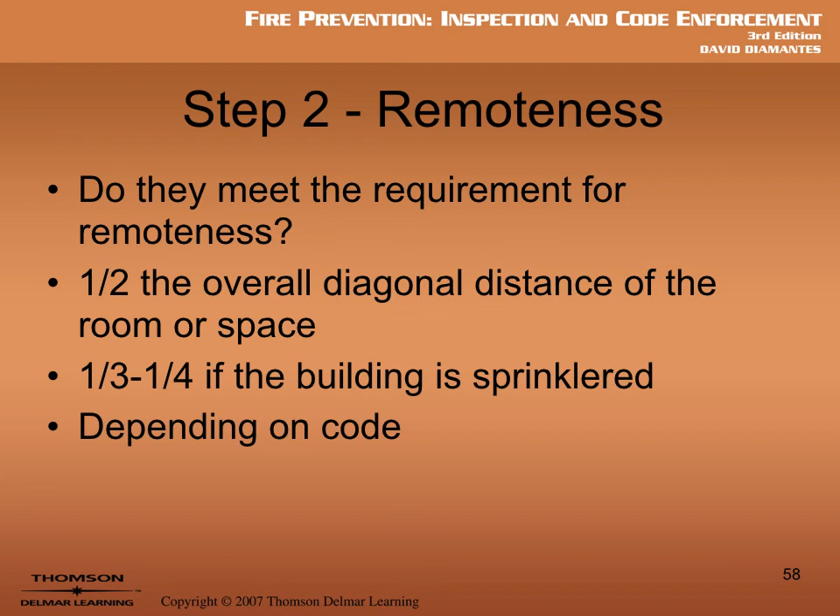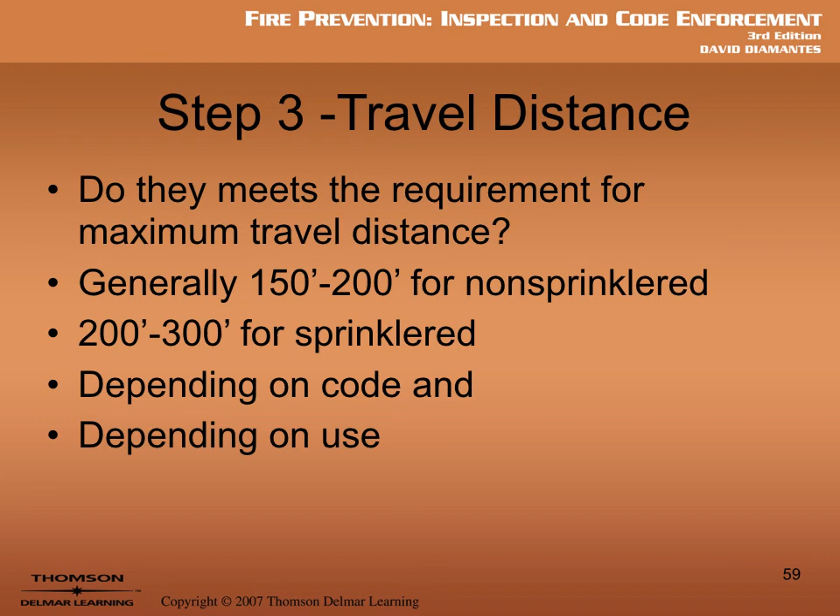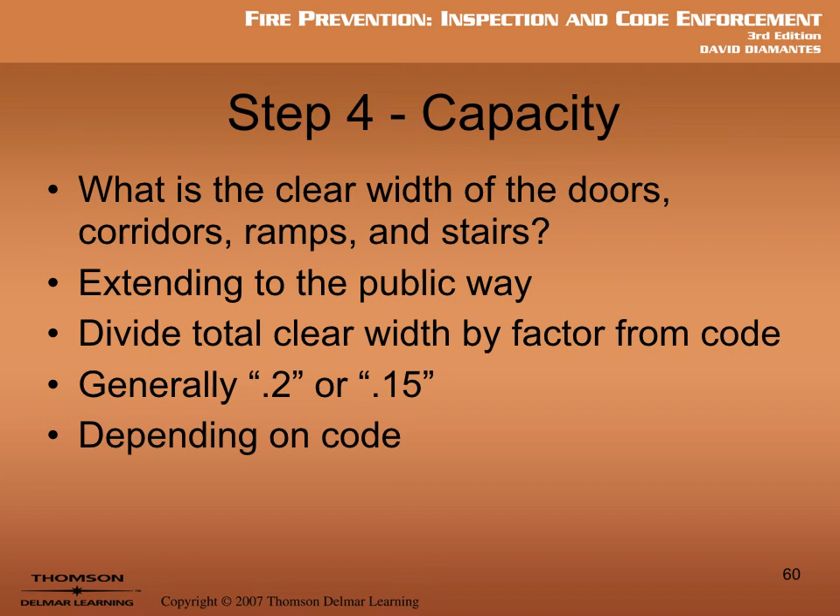So how many exits or exit access doors are available? Are they properly remote, half the distance? Have we made sure that everybody in that room is within the minimum or maximum travel distance? No more. Have we made sure that the hallways, the aisles, all of that meets those numbers of 0.2 or 0.15 if it's sprinklered.

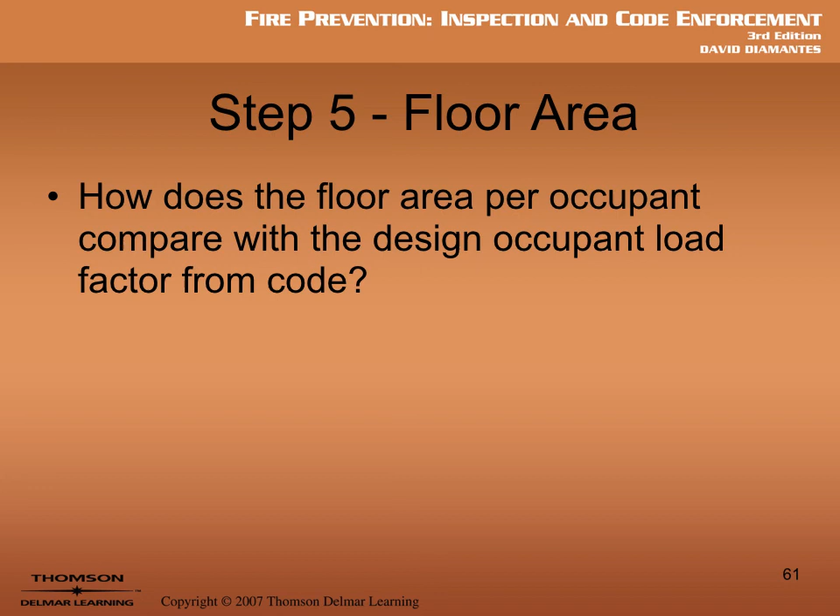And we want to double check our occupant load that we figured out. Is all our math good on that? Do the exit components conform? All the locks single action? Do they latch properly? Are they automatic closing if that's required? Are they fire-rated doors if that's required?

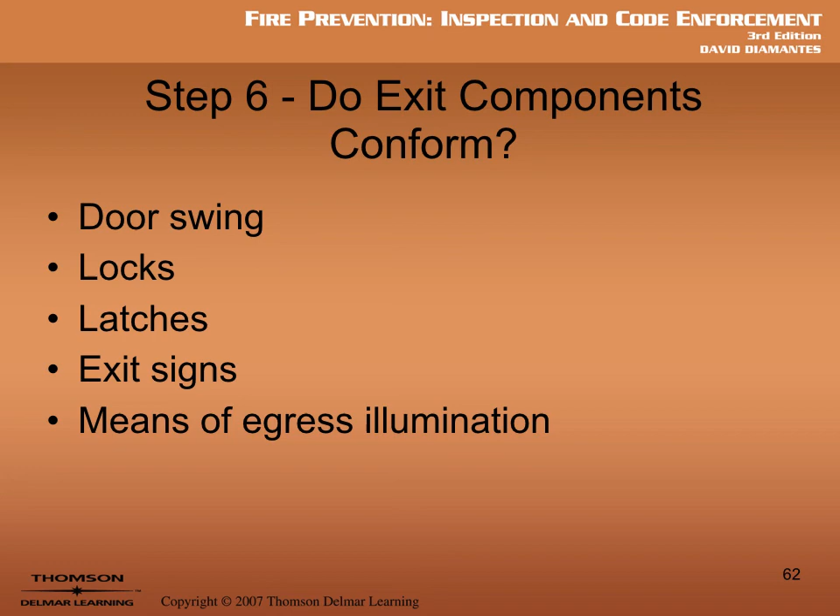Do we have our exit signs? Do we have proper illumination? If we are satisfied with all of that, then we're done. So, in summary, we've got our three parts: exit access, exit, exit discharge.

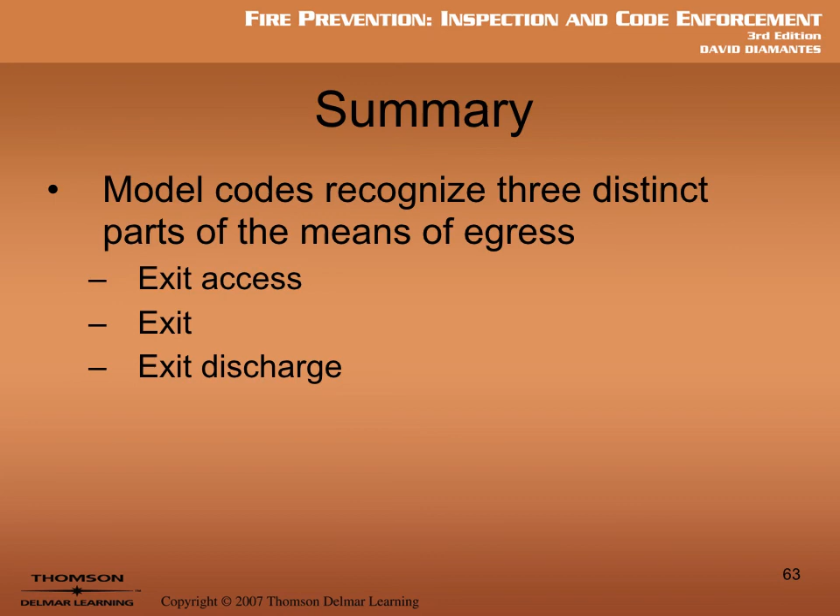Occupants cannot be exposed to a greater level of danger during egress. They've got to be protected. Once they hit the exit, they're protected the whole way. Travel distance is regulated to minimize the time that they are exposed to fire. So they have to be within a certain distance of an exit. Exits, this is really important, can't serve any other purpose. You can't put your storage in the hallway.

And exit discharge sometimes is one of those things that's overlooked. We got to make sure that once you're outside, you're at the public way. If you aren't, we need to make sure that people are still safe while they get to the public way. The last thing we want is get everybody out of the building and then find that they're trapped in a fenced-in area that's locked and they can't get away from the building.

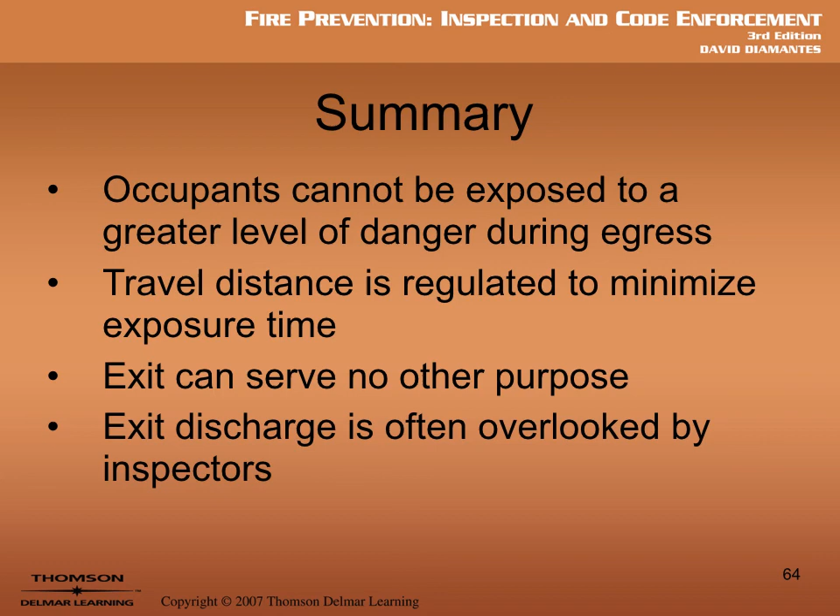And in case of an earthquake, now the building's collapsing on them and we've got people that are all mush, because they're scrunched. So that'd be gross. We don't want that. We want everybody to get out safely. And lastly, all portions of the means of egress system have to be illuminated.

So where did it all start? It started with the design occupant load. You're going to figure that out in our project, the design occupant load, for a whole bunch of different scenarios. Just take the time to look through it. Feel free to call one of your friends and do this together. I don't want you cheating, but I want you helping each other. So email each other, call each other, whatever you want to do. And if you have any problems, email me, and I'll help you out with it and explain it, okay?

Now, one last thing. Illegal changes in use is something we are looking for when we do inspections, because it changes the whole egress component system. So that's why we need to understand occupancy type when we go out and do inspections.